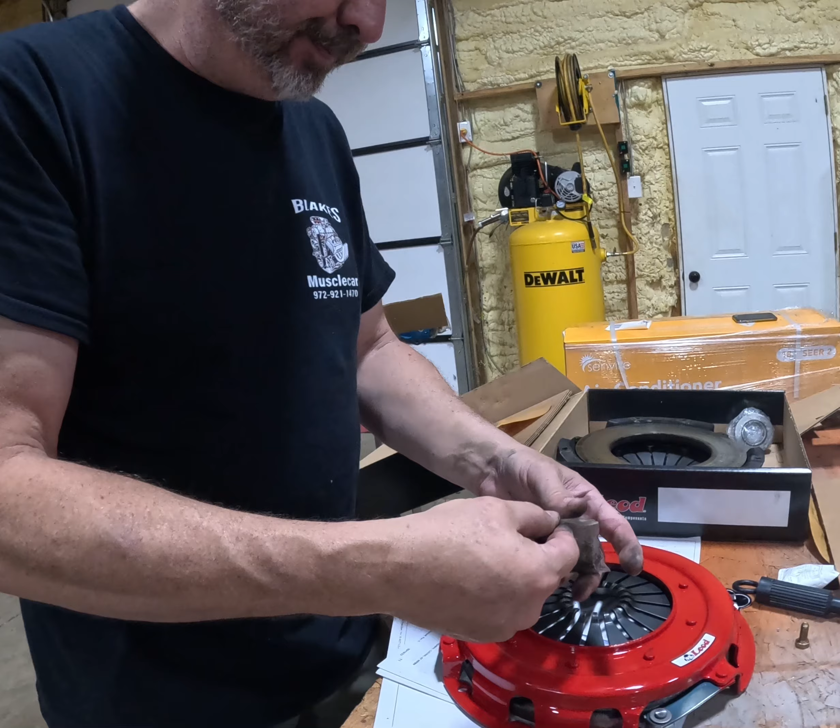So our brakes, as I said yesterday, they are all nice and sealed up. Got our new brake line on. Everything was successful there, so I actually think we're going to see an improvement with the brakes. I think they had air in them. Seems like we got a lot more brake pedal now.

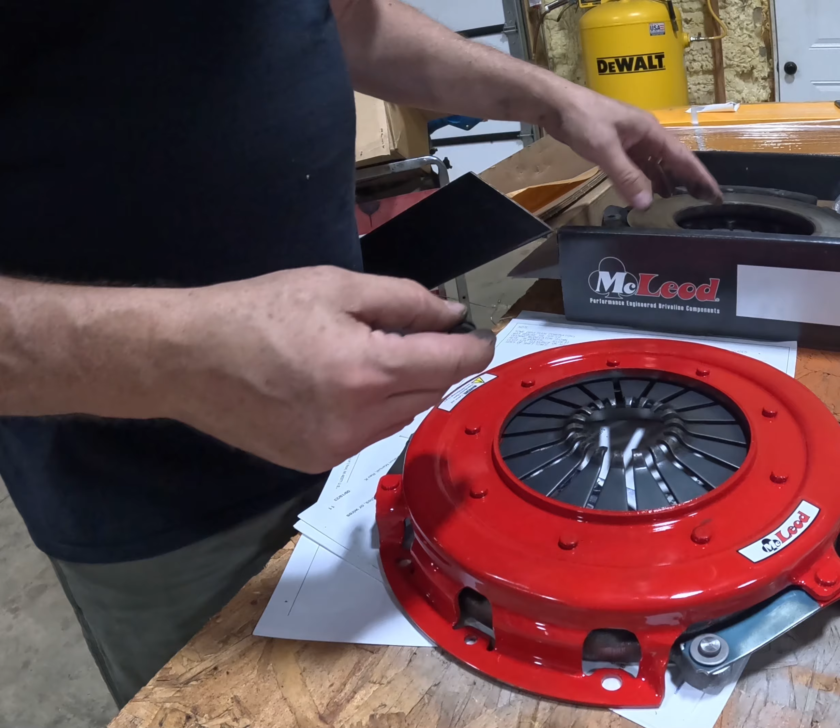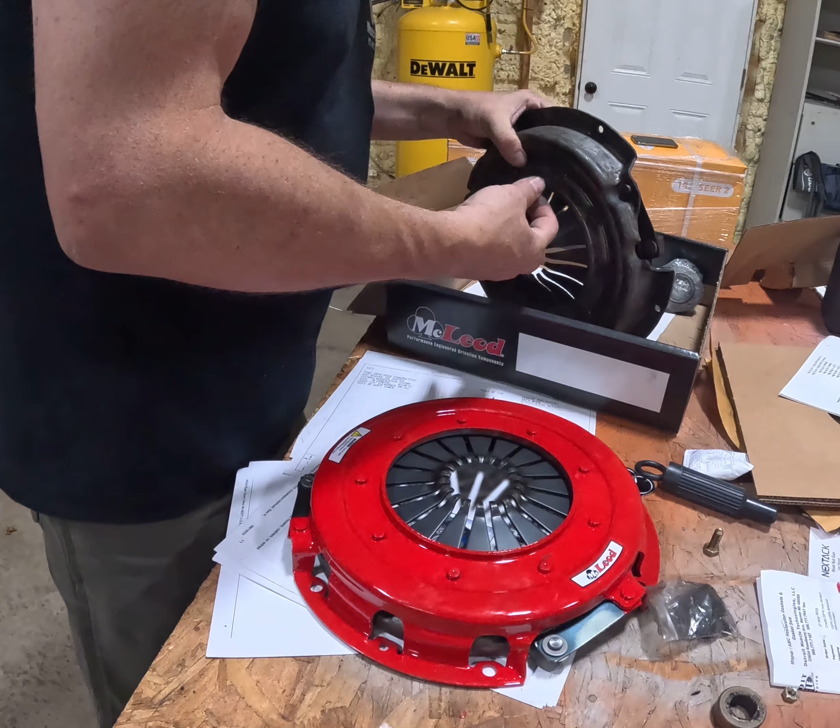But going back to the TKX. First thing we're going to have to do is get this bushing, the original bushing for the 4-speed that they use, and put in the new bushing from TKX. I'm just kind of looking over here, probably need to remove this. I forget what they call this on 4-speeds, but it's not needed. This isn't needed for the Z-bar. We don't have a Z-bar anymore, so probably get that removed.

But I got a tool, and we're gonna see how well it works. So just stick with us. This is a tool I got off Amazon from OEM. It's a pilot bearing puller attachment, and we got another - I believe this is from OEM too. It's a slide hammer. I've been needing a slide hammer for a long time.

Comes with many attachments, but this is just the slide hammer itself. Right here I have other attachments for that. I've been needing one of these for quite some time. So we're gonna see how well this works on removing our pilot bushing.

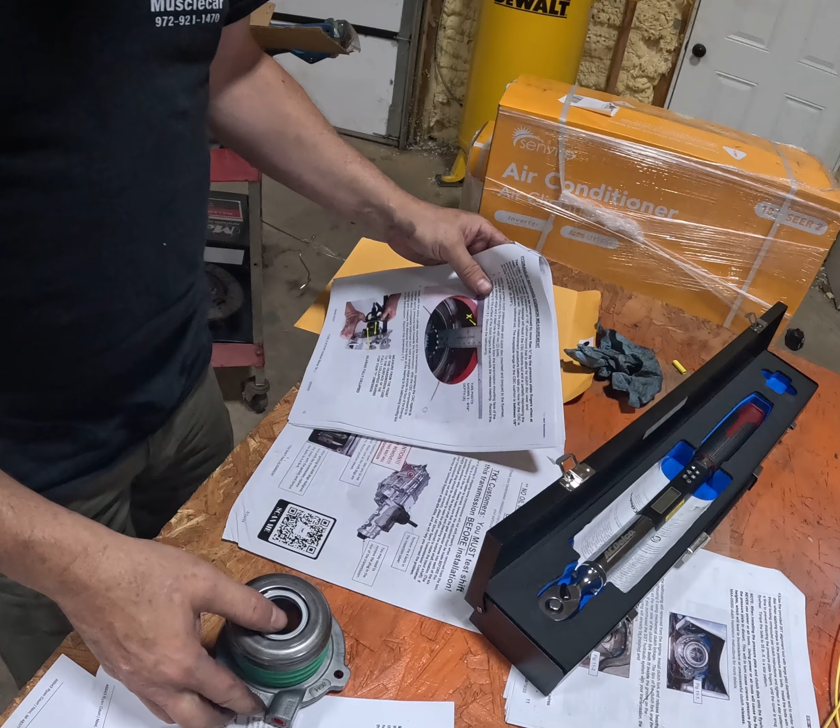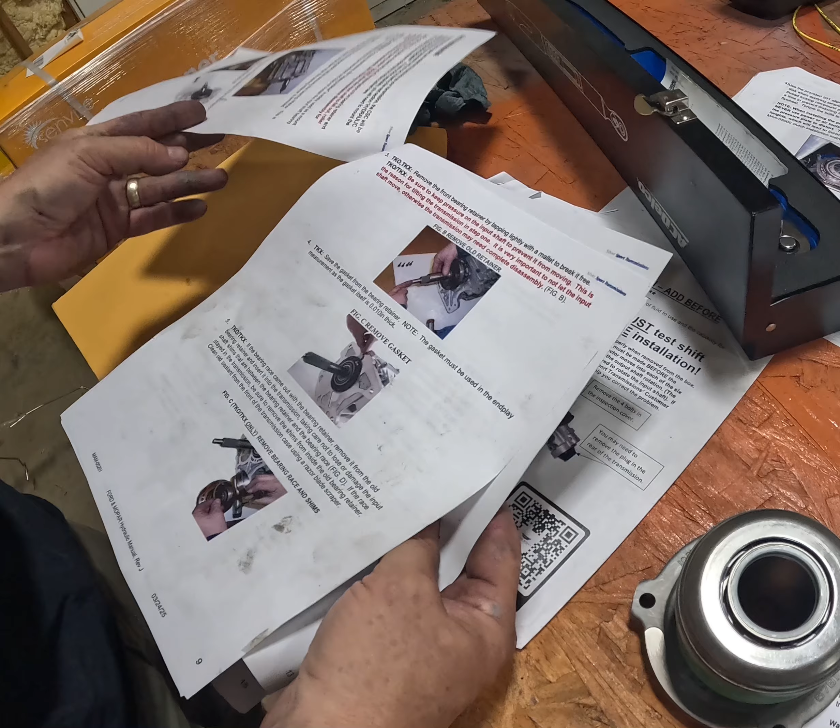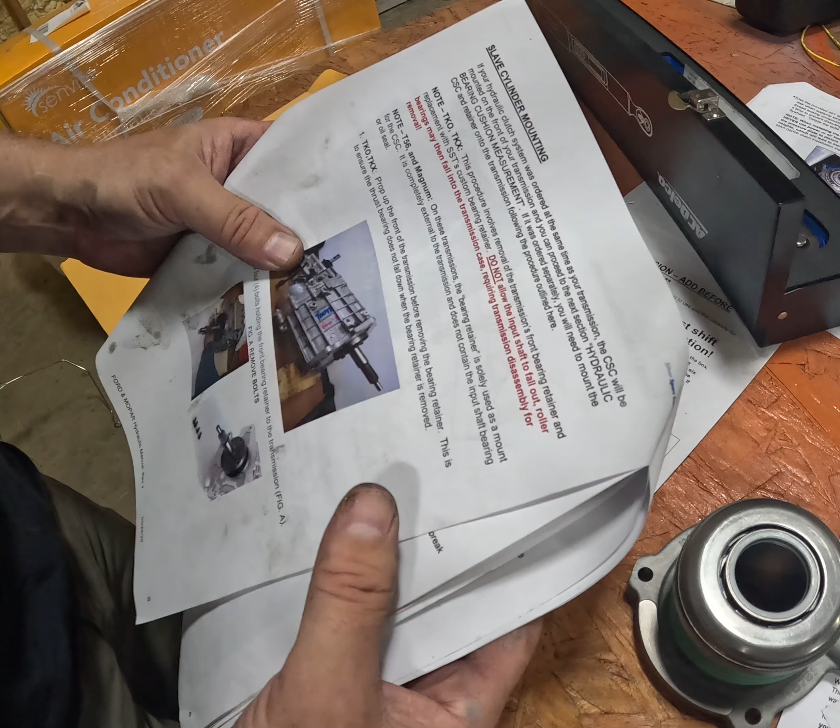Okay, here comes the OEM pilot bearing puller attachment, part number 27059 by OEM. Let's see how this works.

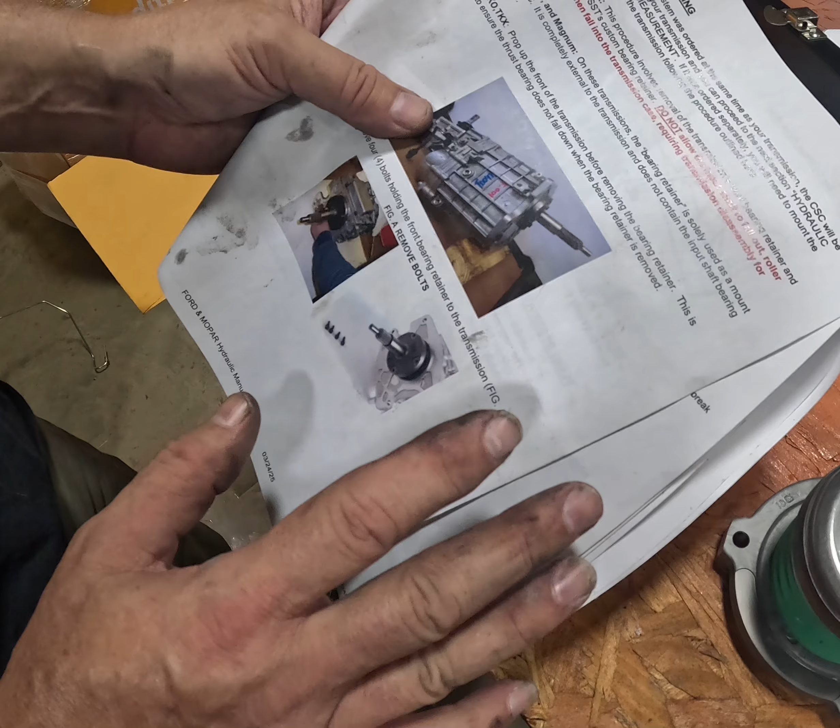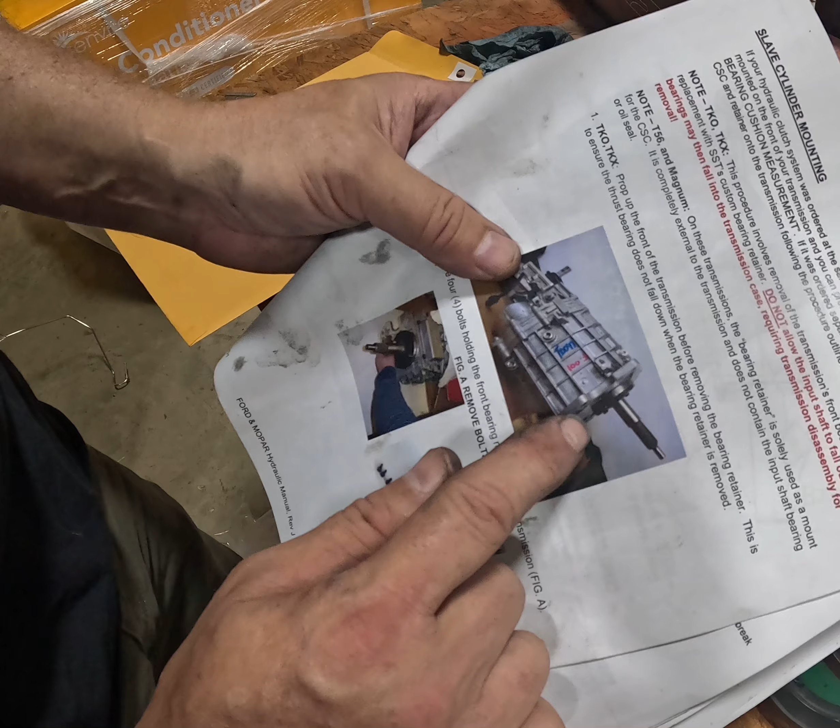Okay, all right, seems pretty tight. Now I'm attaching our OEM slide hammer, part number 37033. There it is, pretty doggone easy. I'm sure there's other ways, maybe a lot easier, I don't know. I always like to have the correct tool, but deal or dud - deal.

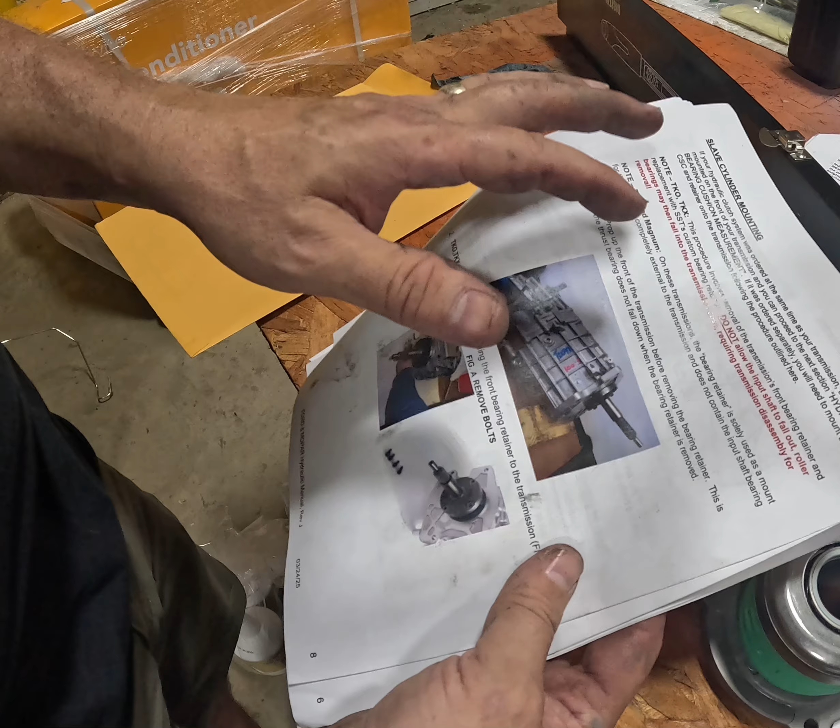The OEM pilot bearing puller attachment right here, and the slide hammer has various attachments. The OEM slide hammer, 37033 I believe. But anyway, this is a deal, pretty easy. So here's our instructions.

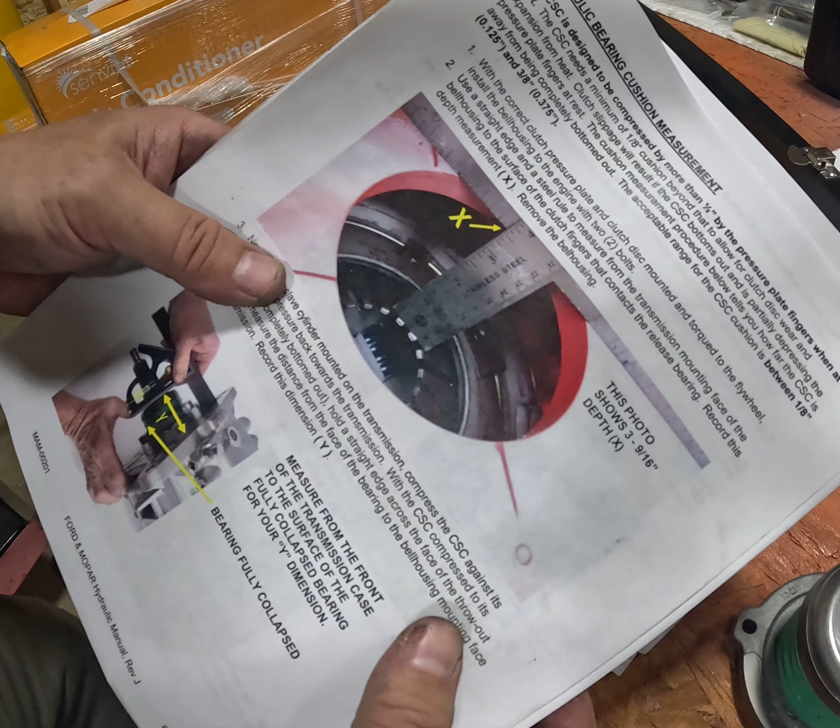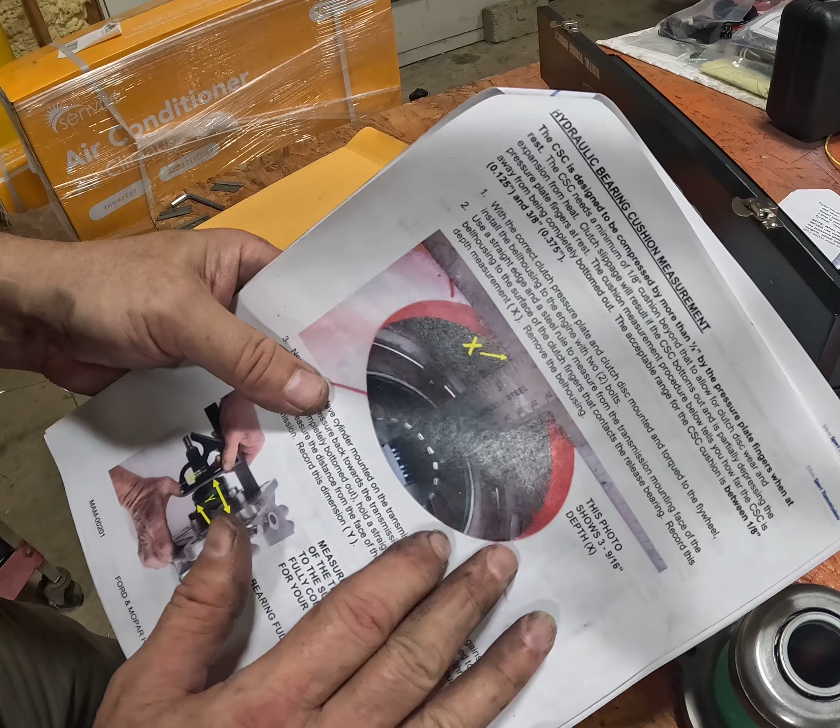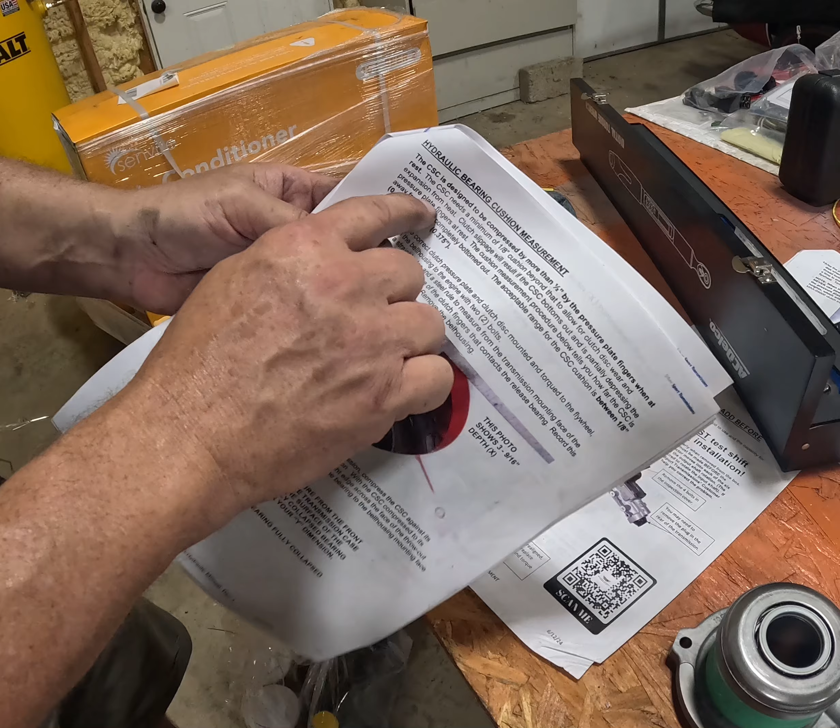So I've got, I think it's a 7/8 socket. I'm not going to bang and tap, I'm just going to see how well this goes in there, and I'm going to stop if I feel like it's damaging anything. So it seems like it's trying to already maybe seat in there. Let's see what happens.

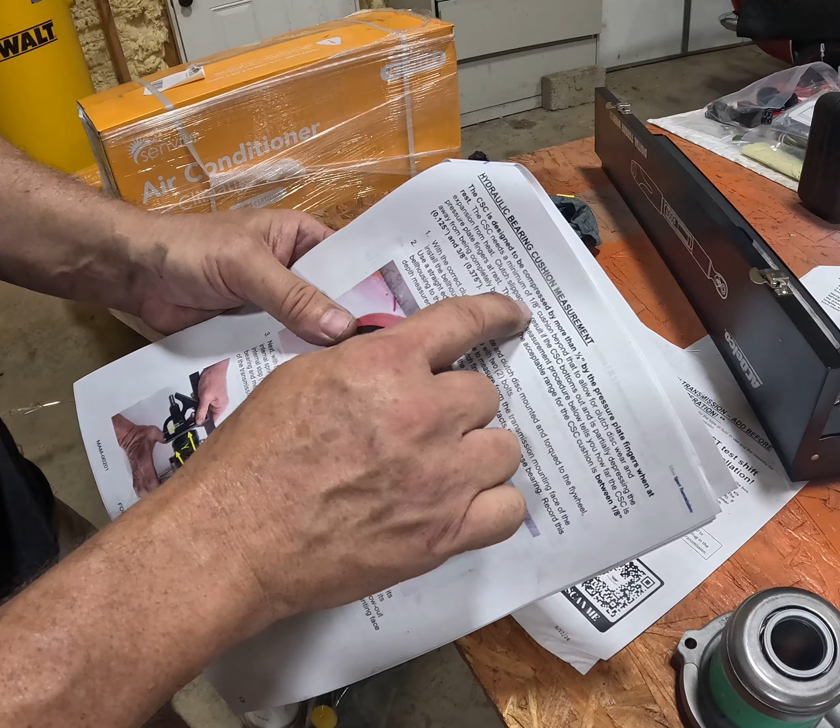My trusty Summit ball peen hammer - I think that means it's a 26 ounce. And we're going to use a 15/16 socket. So here we go.

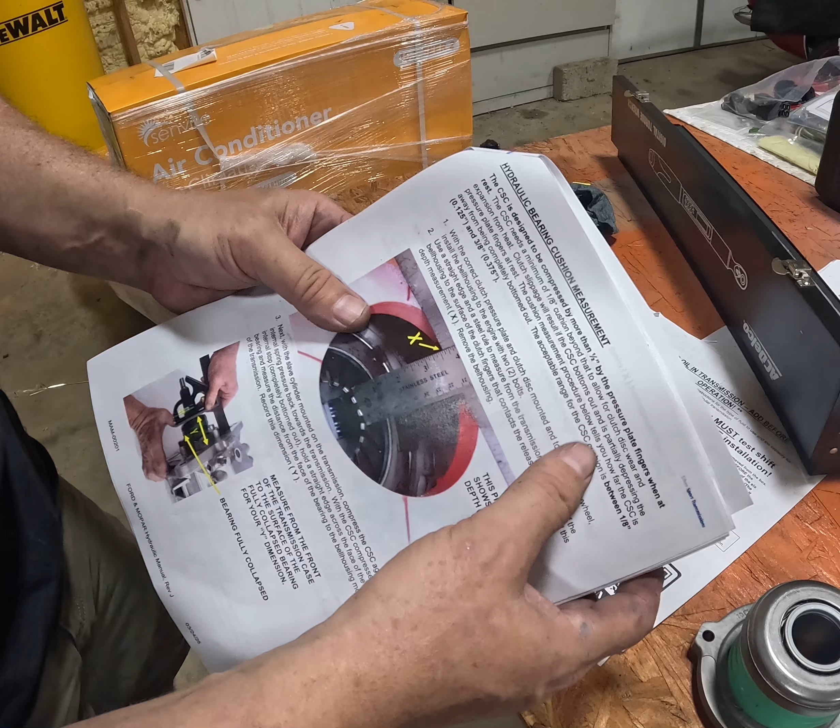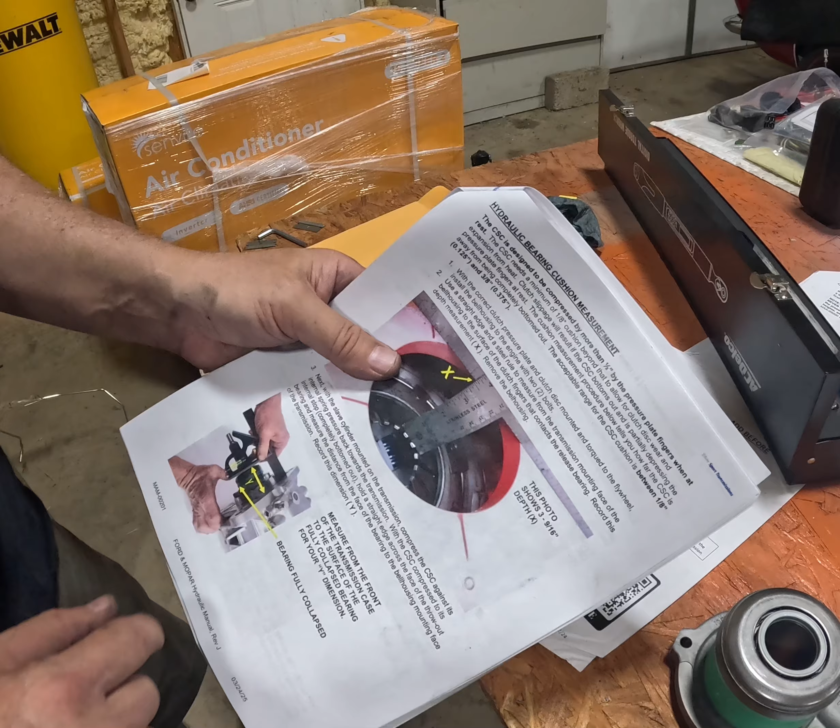Right, moving along now, we've got our new pilot bearing in there. So now, going by the instructions, it says use the provided 26T alignment tool. It is a little confusing here because the transmission, various parts came with an alignment tool, and there's no 26T on there. Then the clutch just came with this tool. So I'm not sure - this is somewhere probably we could clean up the instructions, I think.

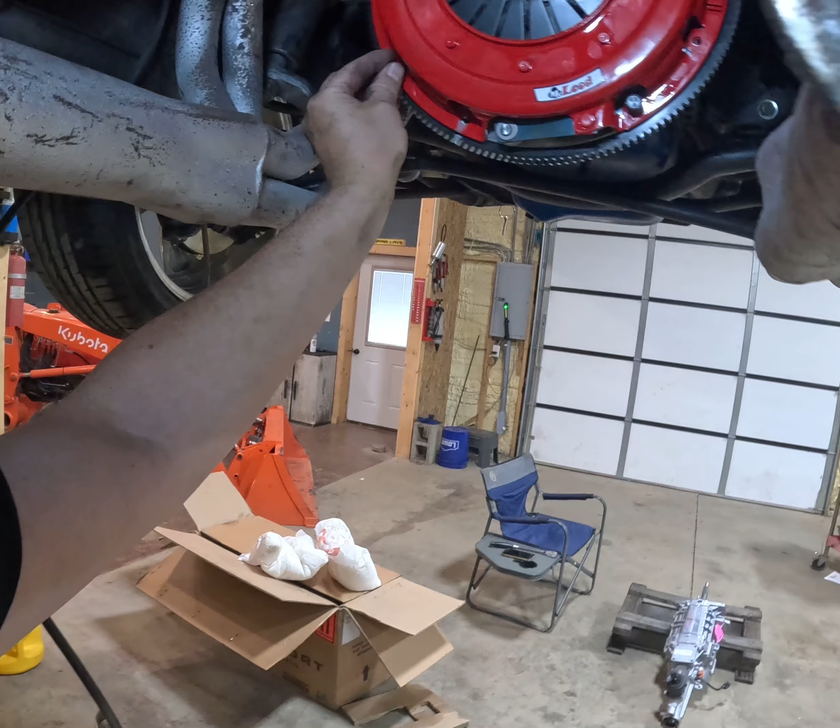Not that they didn't do a great job, but I'm pretty sure this one came with the clutch. This is what I'm going to use. So let's get this thing ready to get mounted, and just read these instructions. All right, here's our McLeod clutch. And then of course, this is the tool that came with the clutch. So let's get these on.

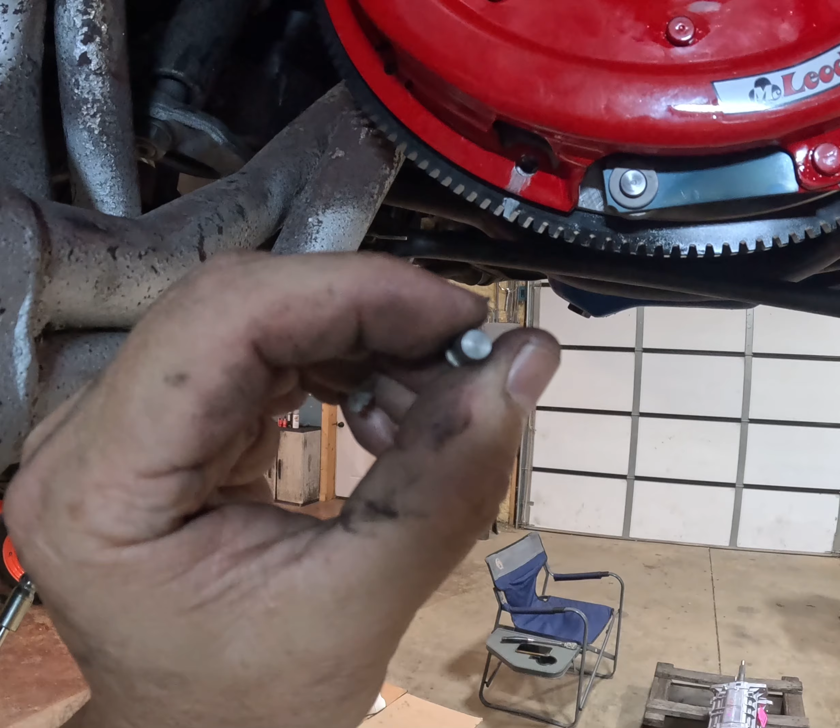Just to make sure everybody knows, it goes on one way. This side here is going to face the back of the car, and this side's going to face the flywheel. So let's get our tool on.

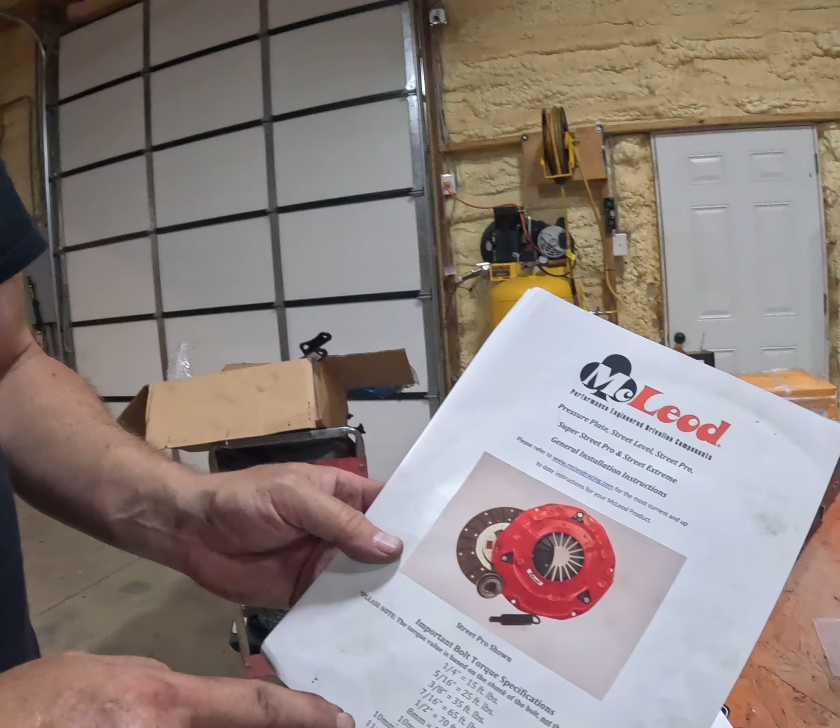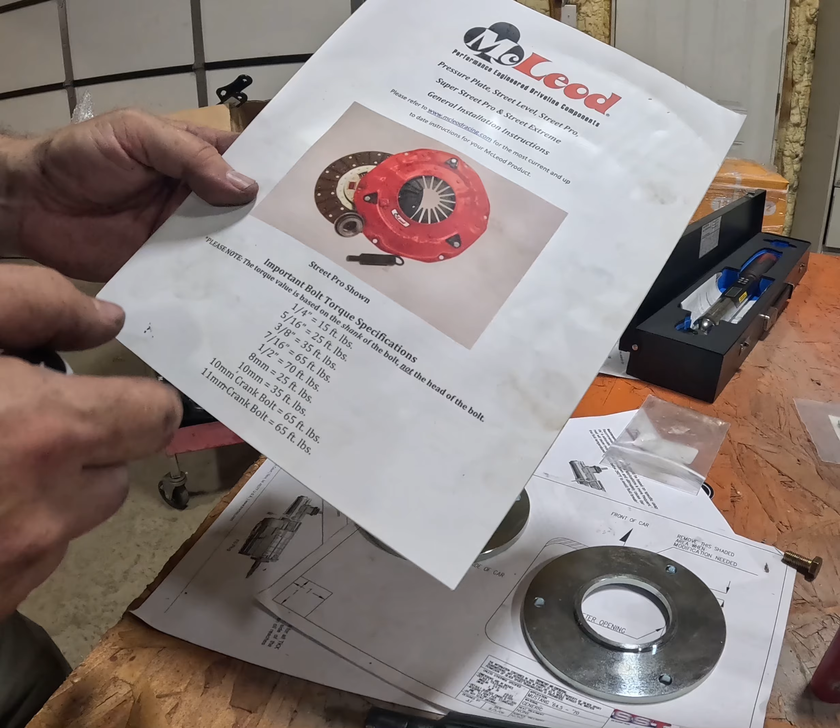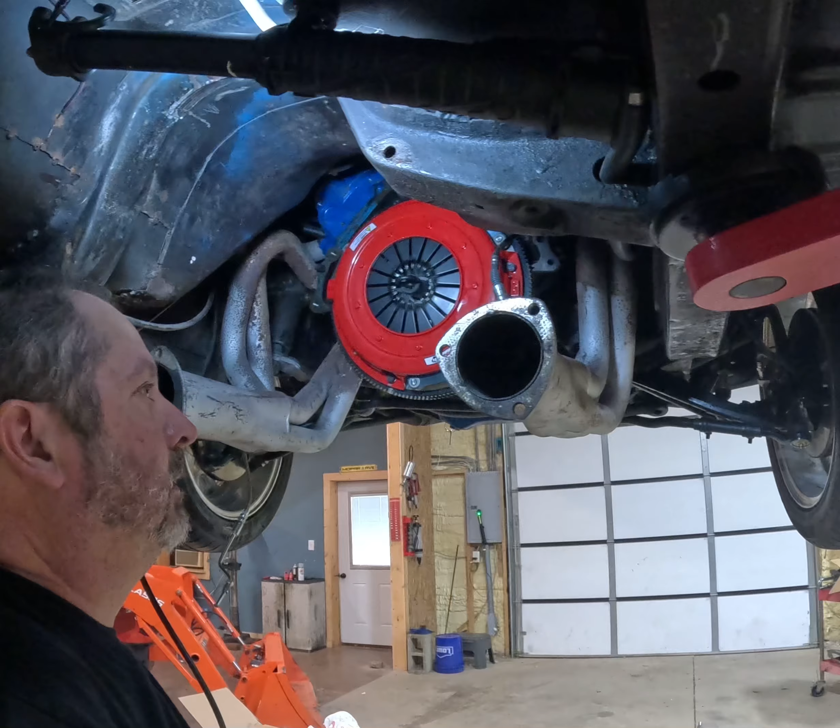So our new flywheel appears to have an 8mm, actually an 8 by 1.25. I've been measuring and trying to verify, using my handy dandy thread checker we got on the wall, it is an 8 by 1.25. Interesting, so it's metric instead of standard.

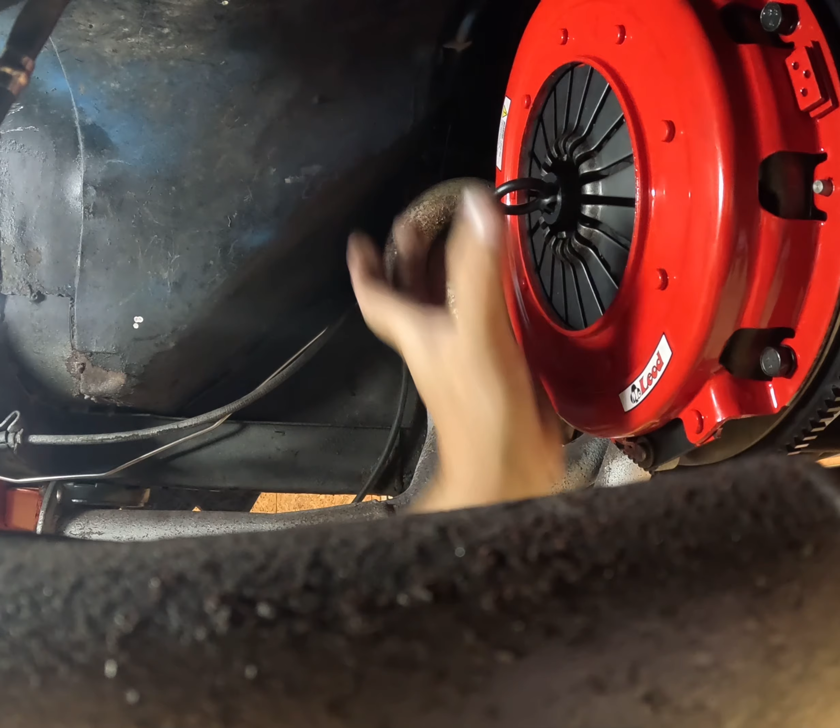Again, it goes all the way in there. I know it's not a 1.0 because it won't start, and the same thing in the flywheel. So they don't tell you what bolts when you get your new flywheel from McLeod. I guess there's too many variances.

I don't know, but the other thing is, the bolts that came out of this thing were grade 5, and about 3 of them I could take out with my fingers. So it's probably all that chatter we saw.

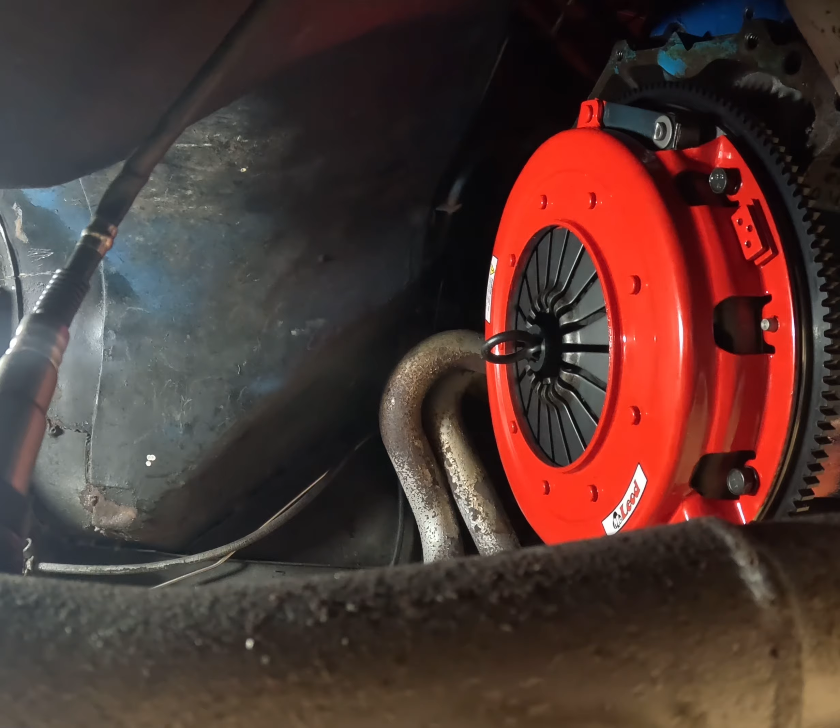So it tells you right over here on the instructions for the clutch, we get ready to put it in, 8 millimeter, we're going to torque these to 25 foot-pounds. I'm going to put a washer and a lock washer, and use the sealant. They recommend using a sealant, I'm thinking the Loctite blue.

So looking here, it tells you somewhere, I just saw it. But anyway, about to get the Loctite out, get these bolts set up. Again, these are grade 8. So if not sure, ARP probably makes one that's even better.

So you guys tell me, you think we should run ARP? I think these grade 8s are going to be fine, especially with the lock washers and the blue Loctite.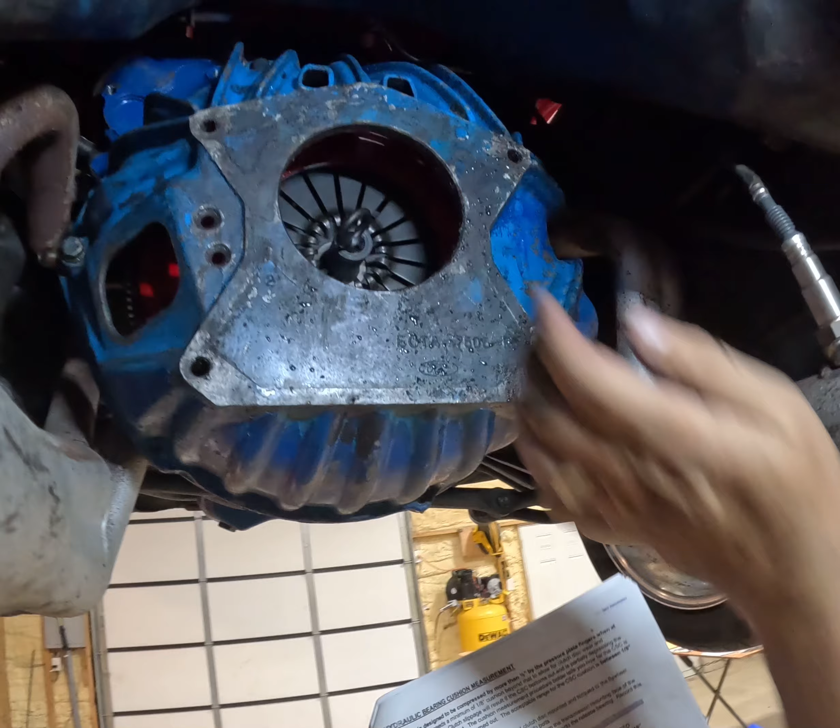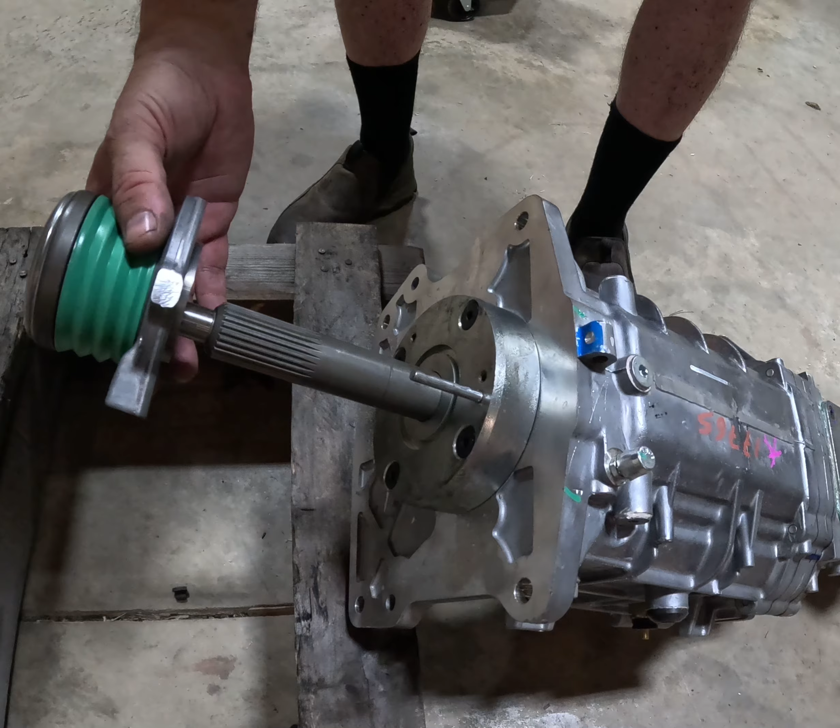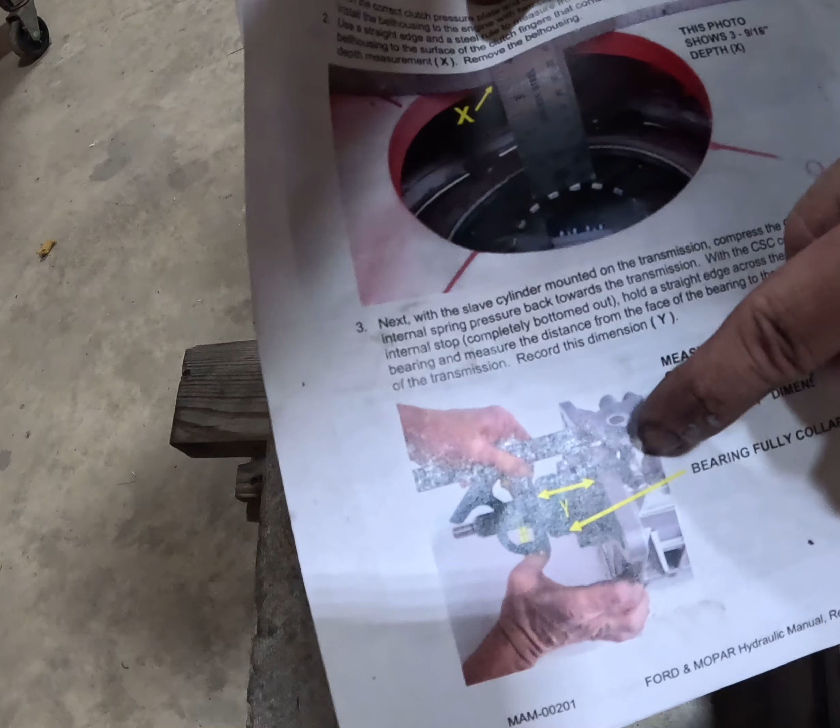But here's where I'm a little perplexed. This new McLeod pressure plate, I don't know that that's right. There's way too much slop in this thing for me. I gotta verify. I mean, you can see there, that's just, no.

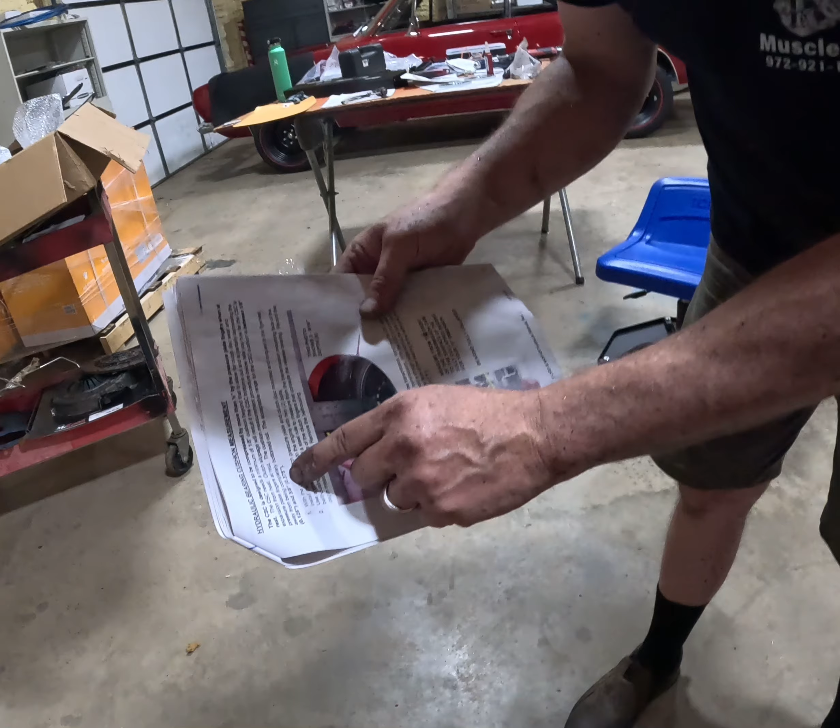So we really need to have clutch flywheel bolts. I've got to stop here. This is not something I'm gonna have any doubt on. You've heard the horror stories about clutches coming up to say hello inside the cabin.

So not doing it, gotta stop on this part here. We might be able to take some measurements with the bell housing. Like I said, I've got the new adjustable dowels that go into the bell housing of the engine plus the yoke.

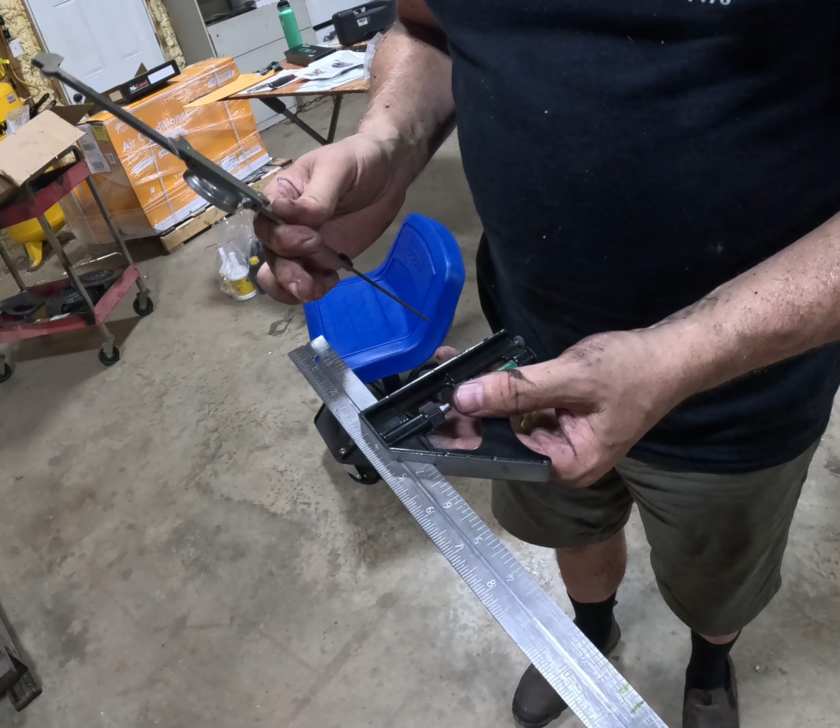But I really can't. I can probably try to do some runouts with what we have, but again, I can't get this clutch on right now because it's got too much ambiguity.

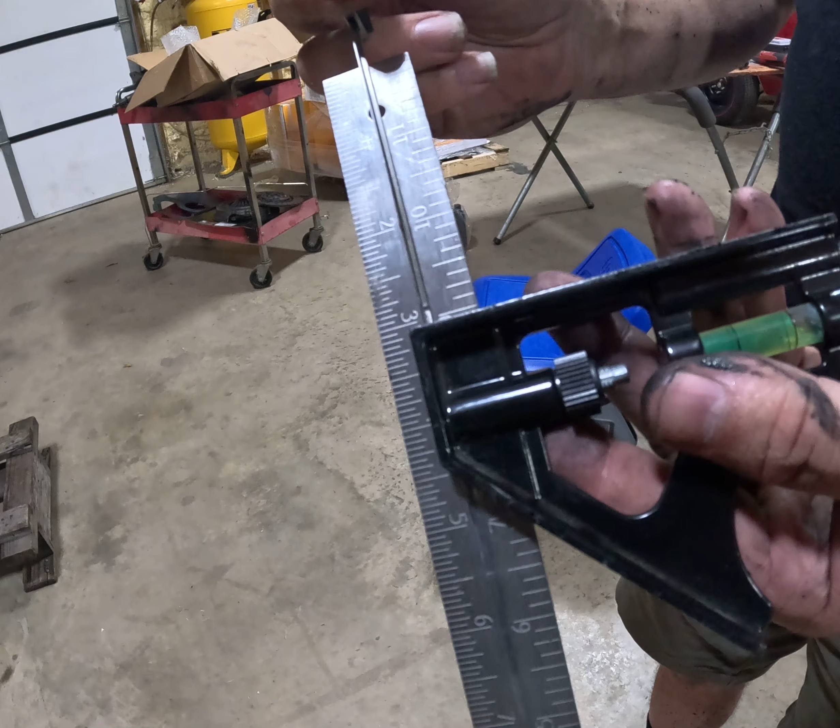These are the old bolts here, the old flywheel. Get these out. These, I believe, are 5/16 coarse, and you put these in, again. These are not something I would use for a clutch. They appear to be grade 5, and 3 of them I could take out by my fingers.

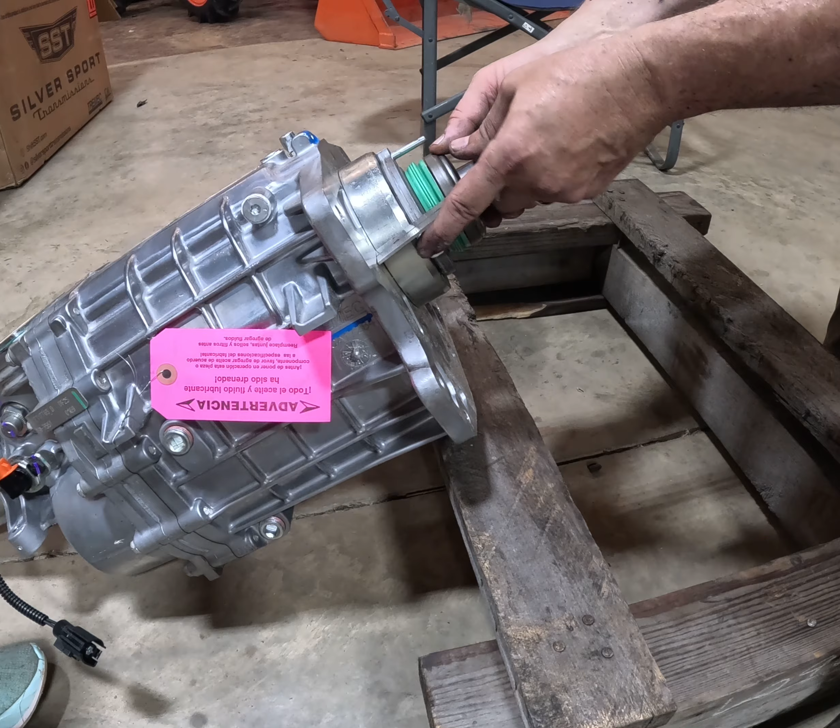But as far as the diameter, I mean, I don't have all that slop. That didn't have near that slop. That's about right for that size bolt. So we gotta figure that out. Just want everybody to see that. And when you're doing one of these mods, you just don't take any chances here. You just don't.

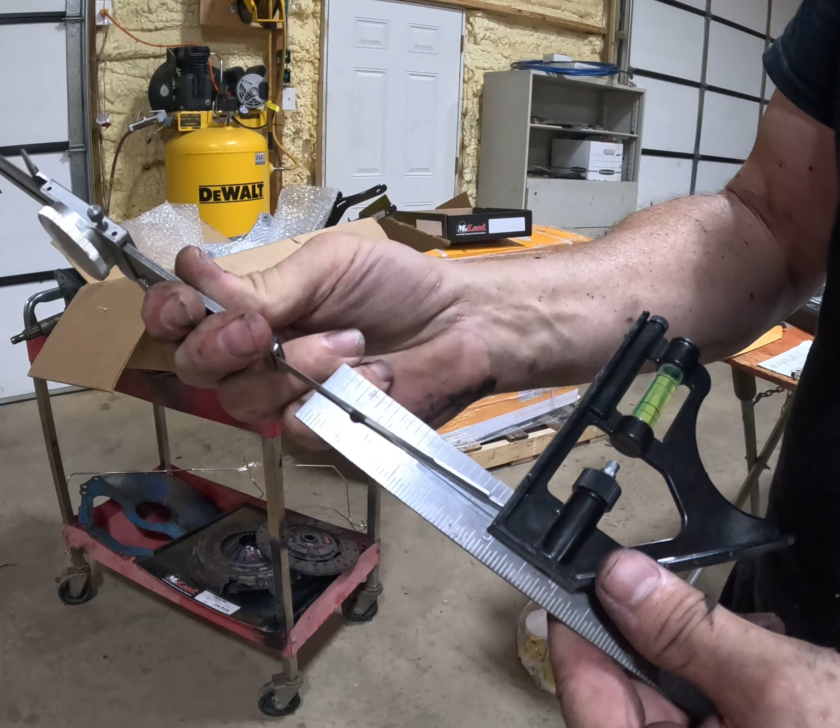So if we can add to this, we're going to, but I gotta stop for the moment. Okay, we found the clutch bolts in it. Trish actually found them. They fit the flywheel fantastic. It does look like they're going to be right for our clutch, but I'm going to verify.

But we can still measure. We're going to move on. So this is our slave cylinder. This is a hydraulic slave cylinder, in case anybody didn't know. So there are several measurements that we have to do.

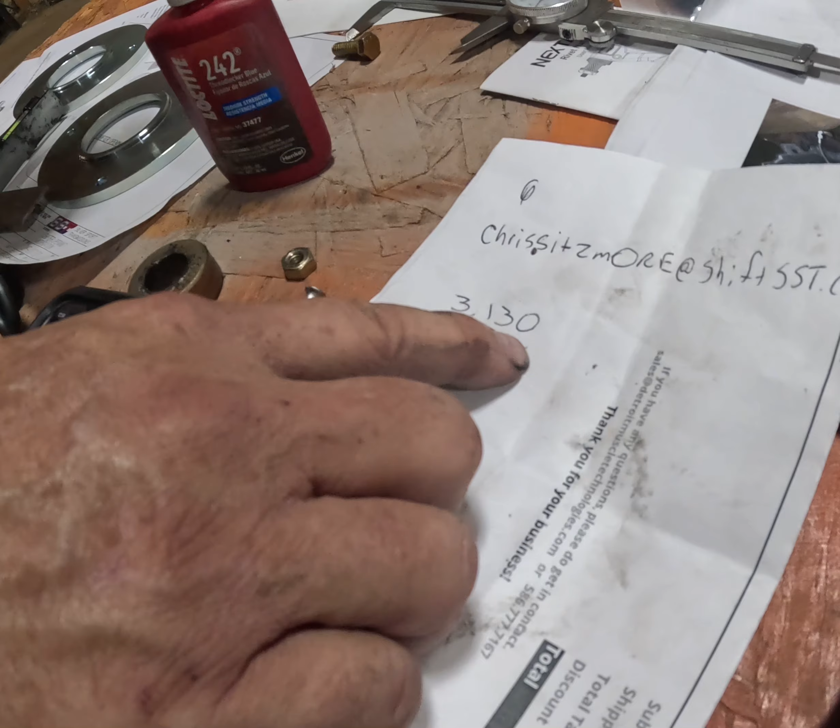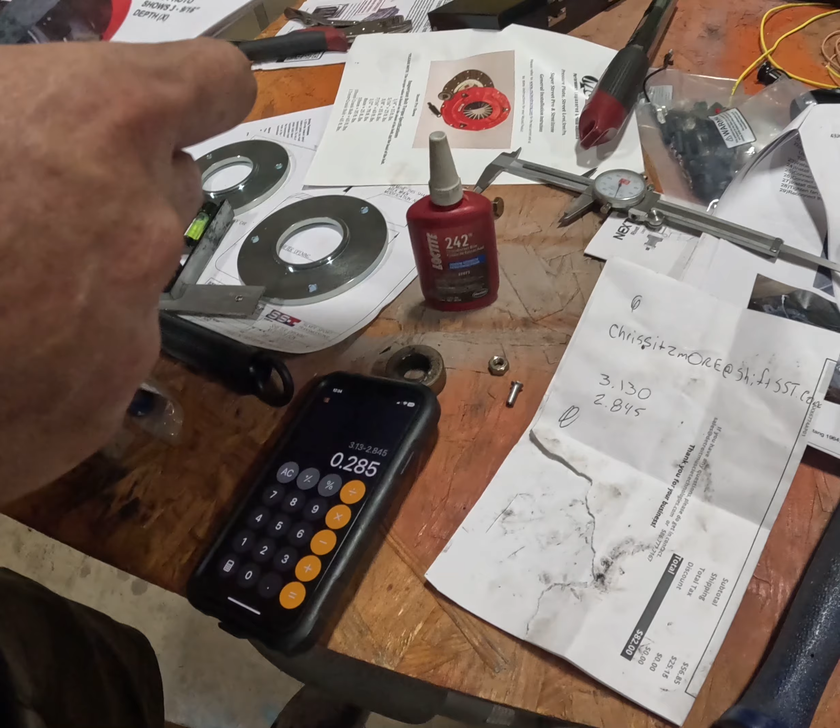One thing that I messed up on is it tells you to make sure right back here, yeah right here, if your hydraulic clutch system was ordered at the same time as your transmission, the CSC, this setup here, will be mounted on the front of your transmission, and you can proceed to the next section, hydraulic bearing cushion measurement.

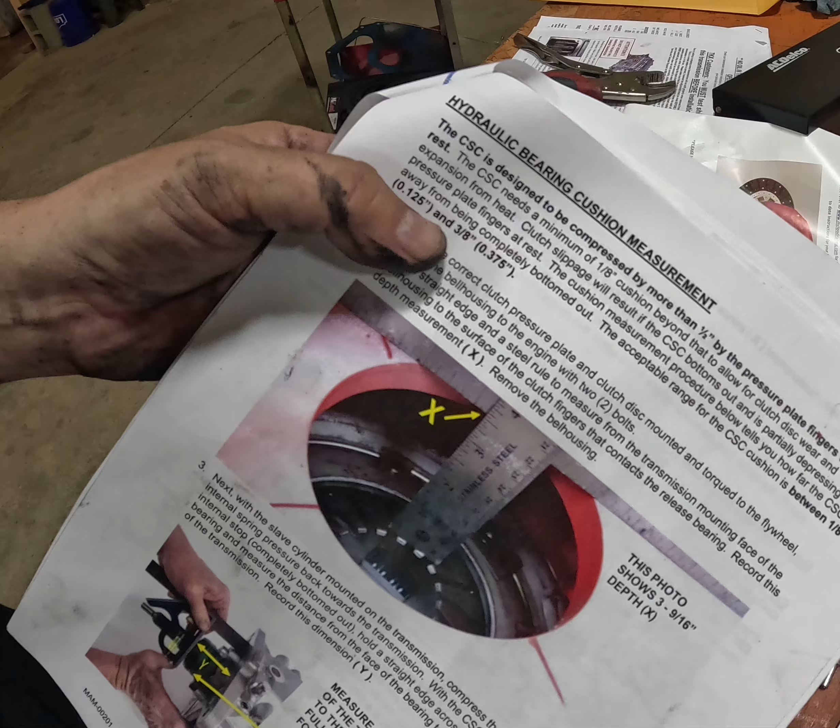I should have known that. I did take this off. Then I realized, oh, it's already set up. So I put everything back, torqued these 4 bolts back to 16 foot-pounds.

You got to be really careful because the bearing race can come out with this. We were lucky, everything was good, and we propped it up just like they said. You pull this out, you start losing bearings on that roller assembly, it's tapered, then you'll be pulling the transmission apart. So take time, make sure you follow directions. I got a little ahead of myself, I didn't have to do that.

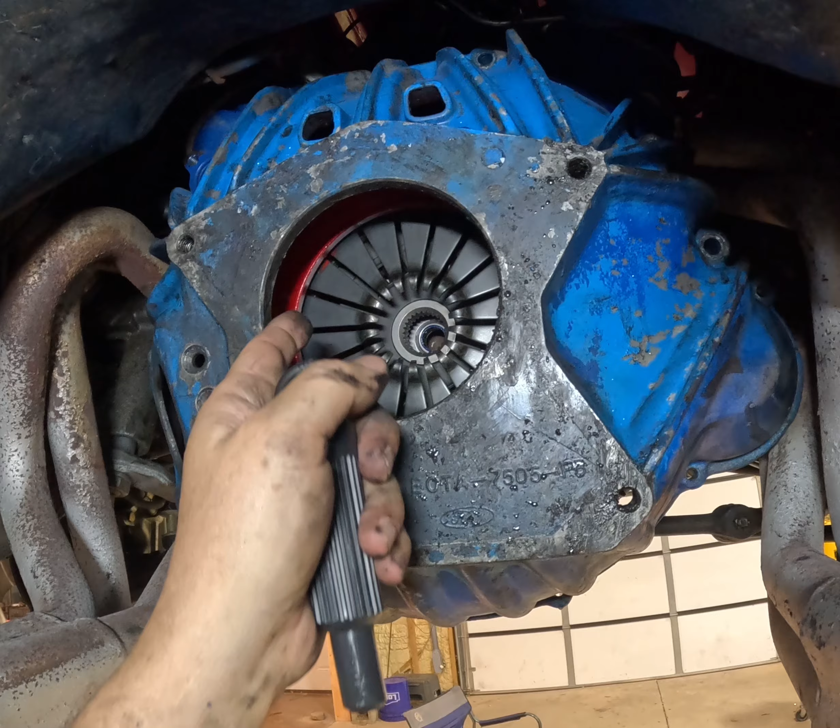So now we're going back to the hydraulic bearing cushion measurement. We're going to get this clutch and pressure plate mounted so we can start taking measurements once we get the bell housing on temporarily. This will all take place, these measurements, then later we'll be doing the run out. As you can see, there's a lot that goes on here when you put this on the front of the transmission, and of course we got to take reference points.

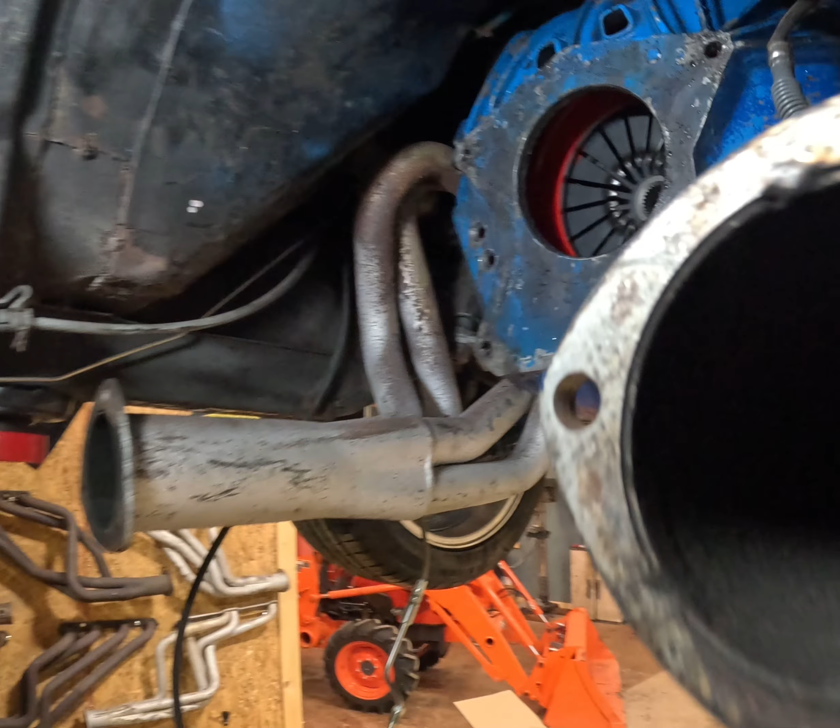Basically what they're saying is the CSC is designed to be compressed by more than a 1/2 inch by the pressure plate fingers when at rest. The CSC needs a minimum of 1/8 of an inch, which is 0.125, cushion beyond that to allow for clutch disc wear and expansion from heat. Clutch slippage will result, obviously, if it bottoms out and is partially depressing the fingers. The cushion measurement procedure tells you how far away it's bottomed out.

So basically you're just taking reference points, that's what we're about to do, about the clutch flywheel issue. So these are the flywheel bolts, they're 8 by 1.25 millimeter. Also in this bag were these 3 pins.

Now again, guys, I don't do a lot of manual transmissions and clutches. Those of you out there have done many, but I kind of figured out on my own. They don't tell you this, but these 3 little holes, these pins, are your anti-rotation pins. They're going to keep it from going anywhere. The large boss is going to get tapped into the flywheel right there. I have timed it, or basically marked the alignment.

So now I'm going to take the clutch back off. I'm going to put these anti-rotation pins in, and then we're going to go in and get our...

Okay, so we have the 8 millimeter bolts, clutch bolts, pressure plate bolts, and it says to torque them to 25 foot-pounds. In addition, I'm going in a star fashion, and I'm using a hand ratchet. Once I feel it start to draw it, I stop, I go to the opposite bolt. So I take my time, it's crucial, that way you don't get your clutch misaligned.